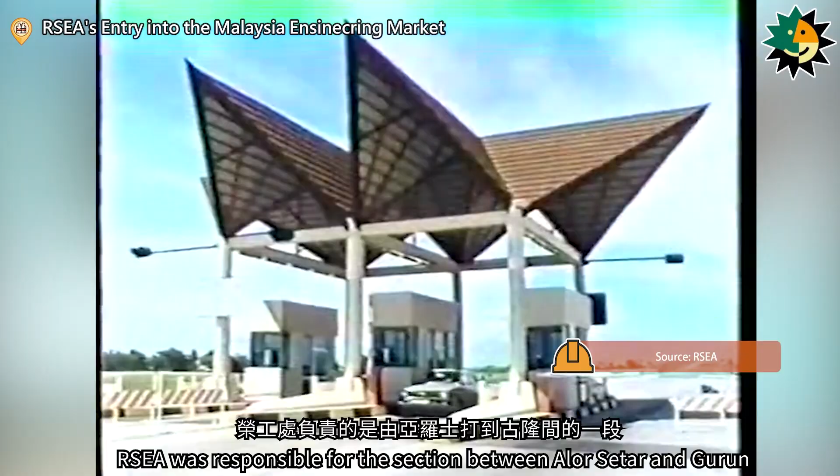The first project undertaken by RSEA Engineering Agency in Malaysia was the North-South Expressway project, a north-south highway spanning a total length of 928 kilometers. RSEA Engineering Agency was responsible for the section between Alor Setar and Gurun. As the route had to traverse swampy terrain, construction proved to be extremely challenging.

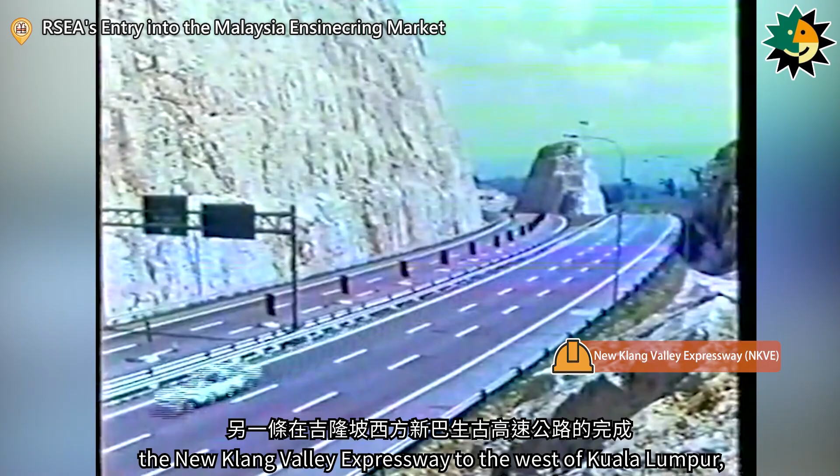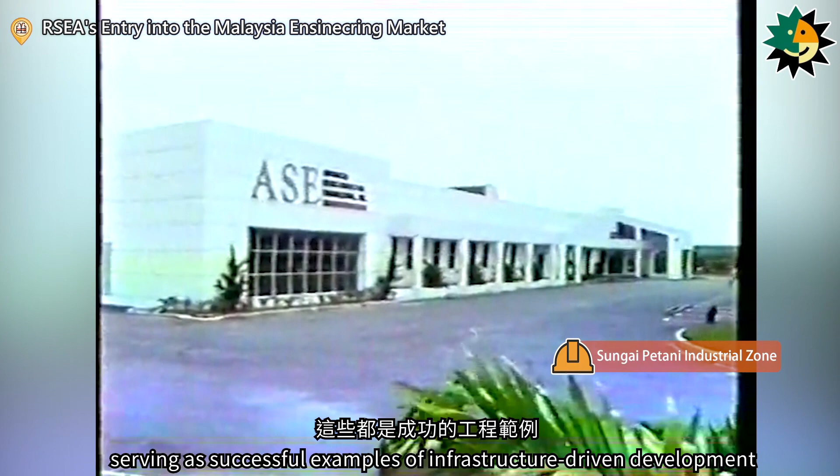The completion of another project, the new Klang Valley Expressway to the west of Kuala Lumpur, opened up a new economic backbone for the region, leading to the development of the free trade zone in Ipoh and the Sungai Petani industrial zone in Kedah. These zones attracted numerous domestic manufacturers to invest and establish factories, serving as successful examples of infrastructure-driven development.

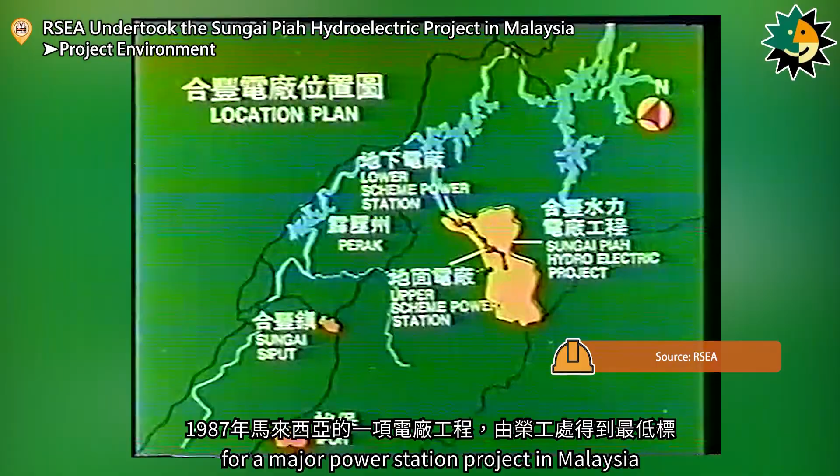In 1987, RSEA Engineering Agency won the lowest bid for a major power station project in Malaysia. The Sungai Piah Hydroelectric project, located in the mountainous region approximately 60 kilometers northeast of Ipoh in Perak, Malaysia, was a massive and formidable undertaking. The project site was located in an undeveloped rainforest at an elevation of 800 meters. To promote economic development in Perak State, the Malaysian government specifically chose the Piah River Basin for the construction of the power station. The planned catchment area covered 364 square kilometers.

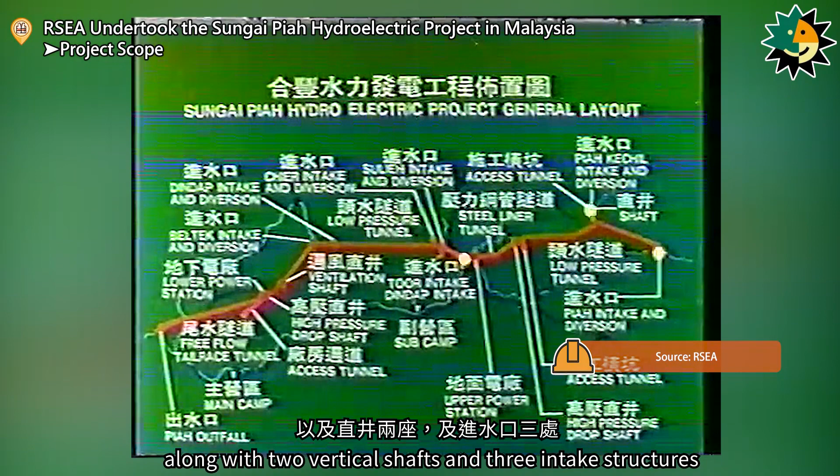The entire project was primarily divided into two construction sections, the upstream and downstream segments. The upstream section included an upper power station, a low-pressure tunnel, steel liner tunnel, and access tunnels totaling 8,000 meters in length, along with 2 vertical shafts and 3 intake structures. The downstream section included a low-pressure tunnel, plant access tunnels, a lower power station, steel liner tunnels beneath the plant, and a free-flow tail-race tunnel, totaling 16,000 meters in length. It also featured 4 intake structures and 6 vertical shafts.

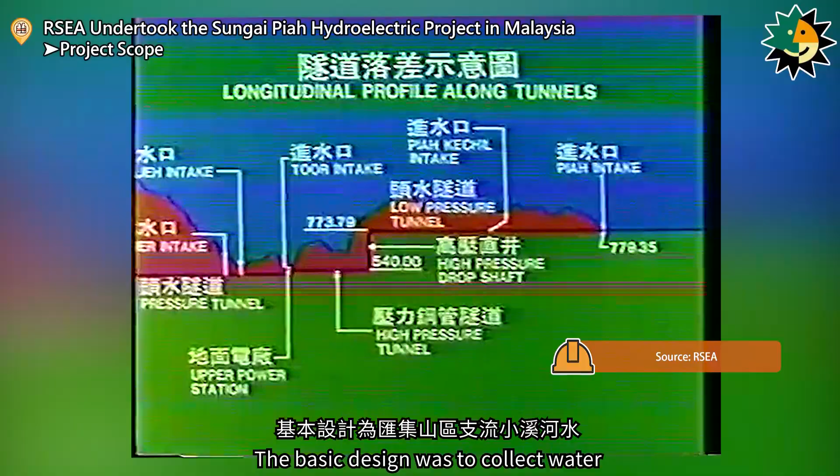Other construction work included more than 1.6 million cubic meters of surface excavation, over 300,000 cubic meters of backfilling, 66 kilometers of road improvement, 11 kilometers of new road construction, and 5 bridges. The basic design was to collect water from mountain streams and tributaries, channeling it to the power station through diversion tunnels, and using the elevation drop and abundant inflow to generate electricity.

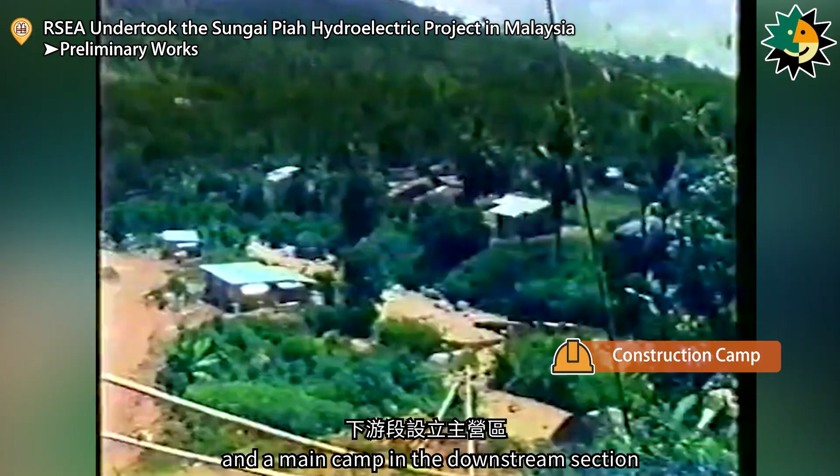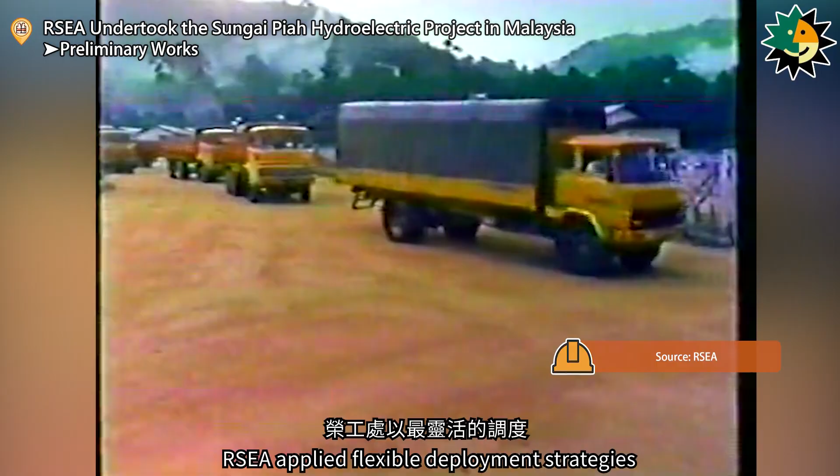The project officially began on April 10, 1987. In the early stage of construction, a secondary camp was established in the upstream section and a main camp in the downstream section. Construction equipment was sourced from Saudi Arabia, Gurun, and Taiwan. RSEA Engineering Agency applied flexible deployment strategies to make the most efficient use of these resources.

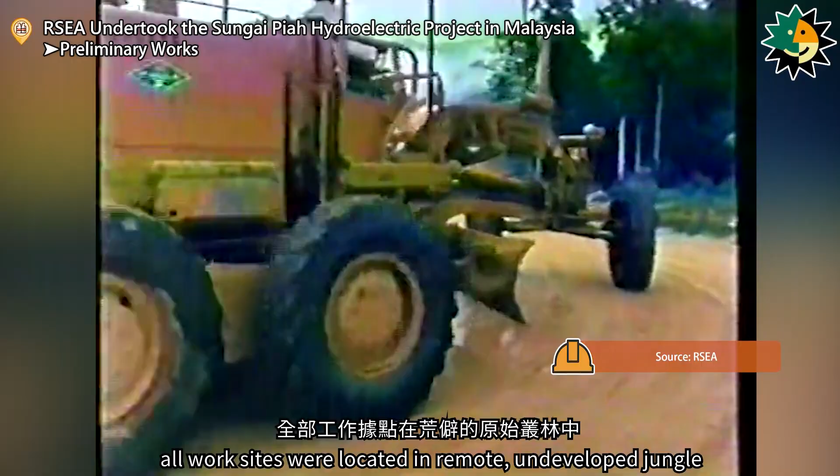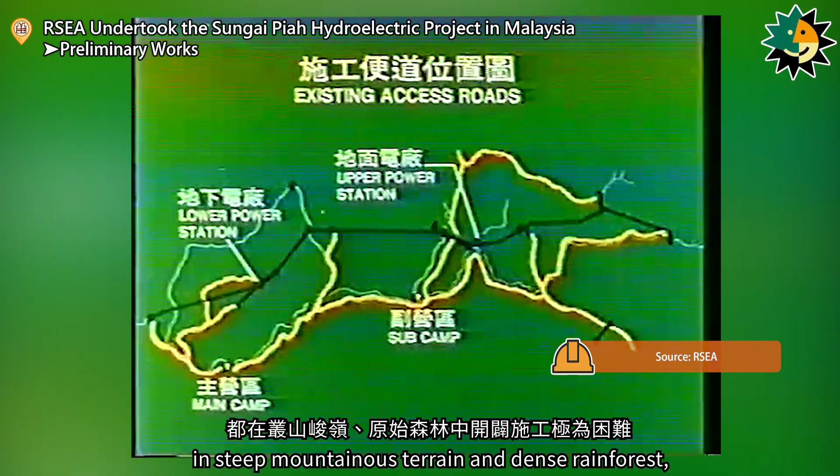As the project area spanned a radius of 95 kilometers, all work sites were located in remote, undeveloped jungle. Survey crews had to traverse mountains and ridges on a daily basis, and the work was extremely demanding. Construction roads served as the main arteries for the project, with a total road length of approximately 91 kilometers within the work area. All construction had to be carried out in steep mountainous terrain and dense rainforest, making the work extremely difficult.

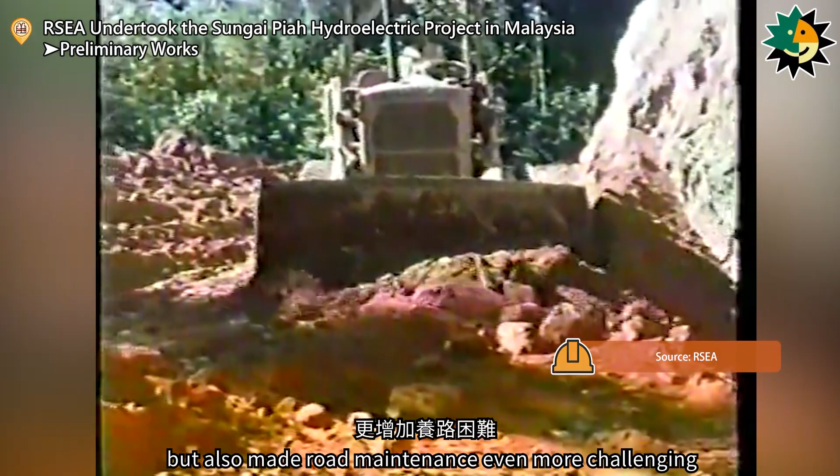Among the total length, 35 kilometers were shared with logging trucks operated by forestry agencies, which not only carried heavy loads and caused significant damage, but also made road maintenance even more challenging. RSEA Engineering Agency therefore established a dedicated road maintenance team to carry out repair and upkeep work, ensuring smooth transportation and supply access. The total length of tunnels in the Sungai Piah Hydroelectric project reached 23 kilometers, making it the most challenging part of the entire construction.

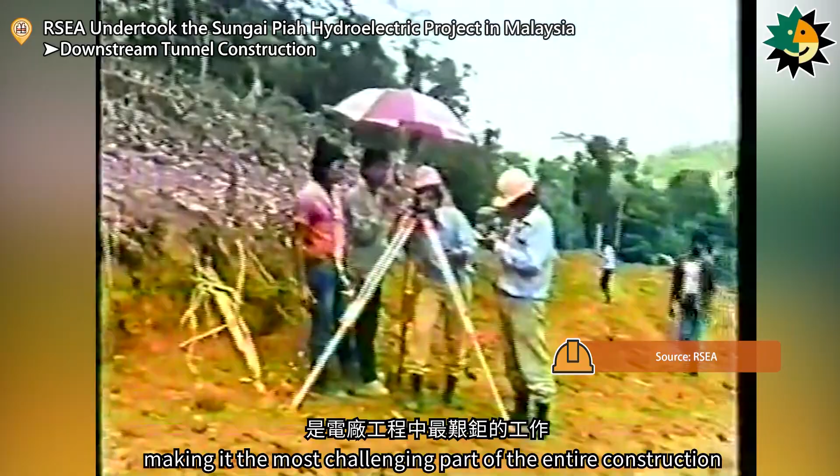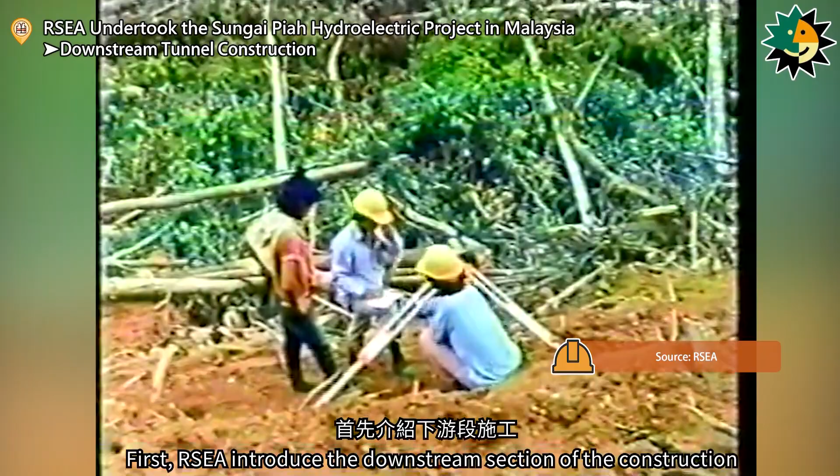First, RSEA Engineering Agency introduced the downstream section of the construction. 4 work phases were carried out simultaneously in the downstream section, including a 17-kilometer main tunnel, access tunnels, a free-flow tailrace tunnel, and 1 lower power station. The tunnels were constructed in 3 different diameters: 6.2 meters, 3.42 meters, and 3.72 meters.

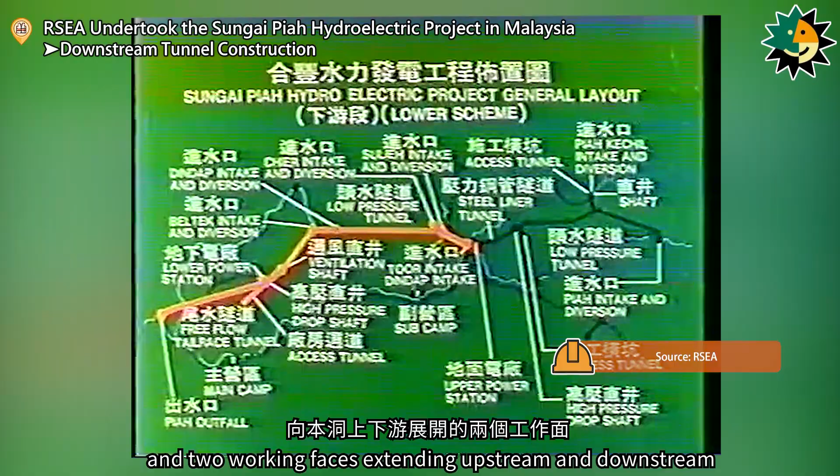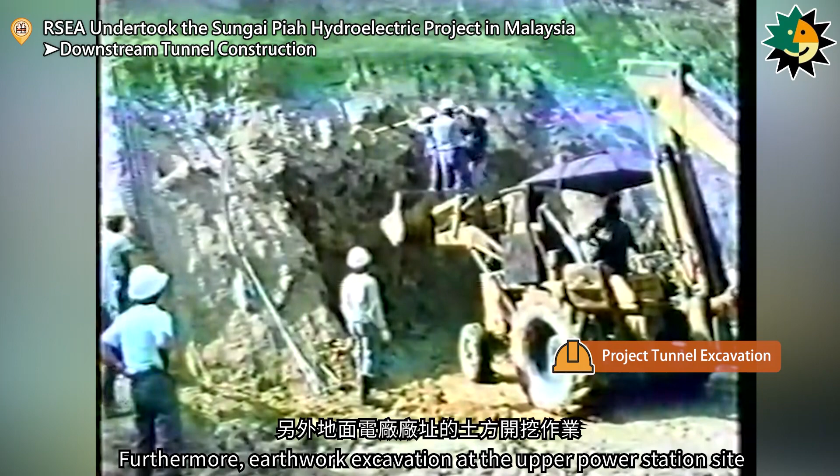At the initial stage of construction, work began at the Dindap Adit and 2 working faces extending upstream and downstream toward Beltek Adit, the access tunnel to the lower power station, the upstream vertical pressure shaft tunnel, and the Piah Kechil Adit. Furthermore, earthwork excavation at the upper power station site was also progressing at full speed.

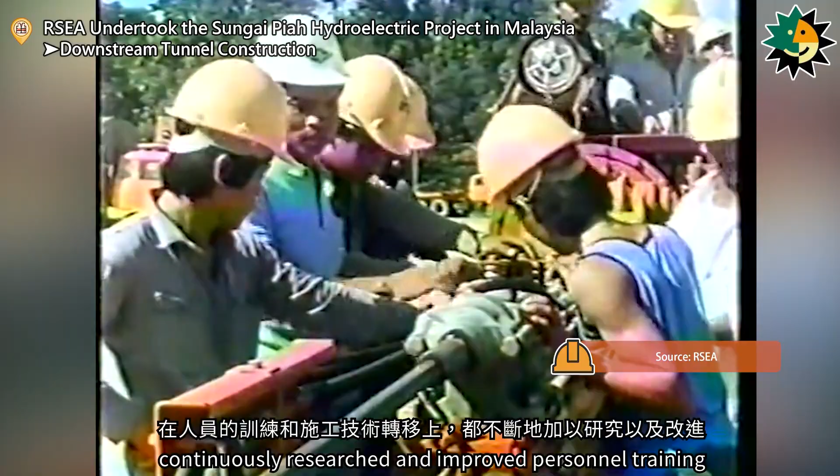In addition to on-site construction work, the Sungai Piah Construction Office continuously researched and improved personnel training and the transfer of construction techniques. This project adopted the new Austrian tunneling method for tunnel excavation. Construction personnel first conducted surveying and staking out, followed by drilling blast holes using a jumbo drill, then loading explosives and wiring them for detonation.

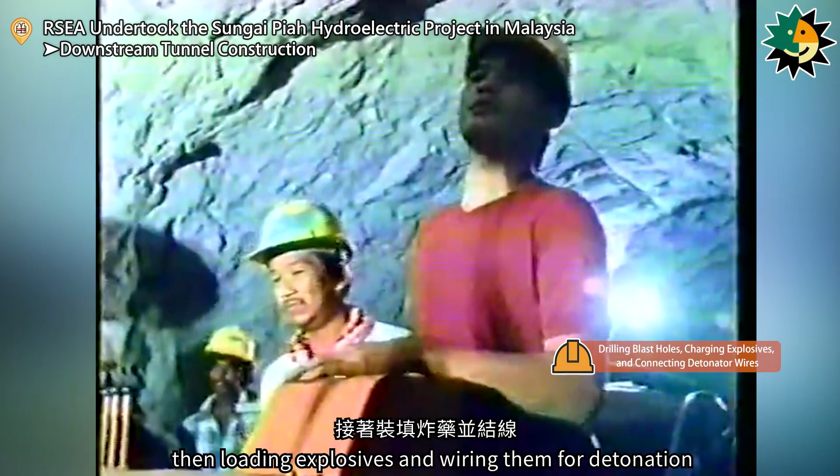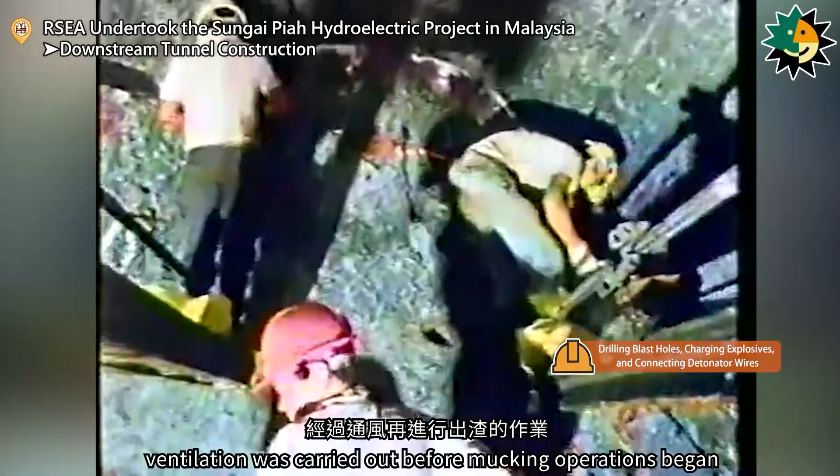To overcome the challenges of tunnel excavation, the construction team carefully developed various blasting techniques to adapt to different rock formations, avoid over-excavation, and reduce construction costs. After blasting, ventilation was carried out before mucking operations began.

In the early stages of tunnel entry, due to the narrow and extended cross-section of the tunnel, RSEA Engineering Agency had to rely on small auxiliary equipment to remove the muck in order to maintain construction progress. However, both excavation and mucking operations were difficult and affected the project schedule.

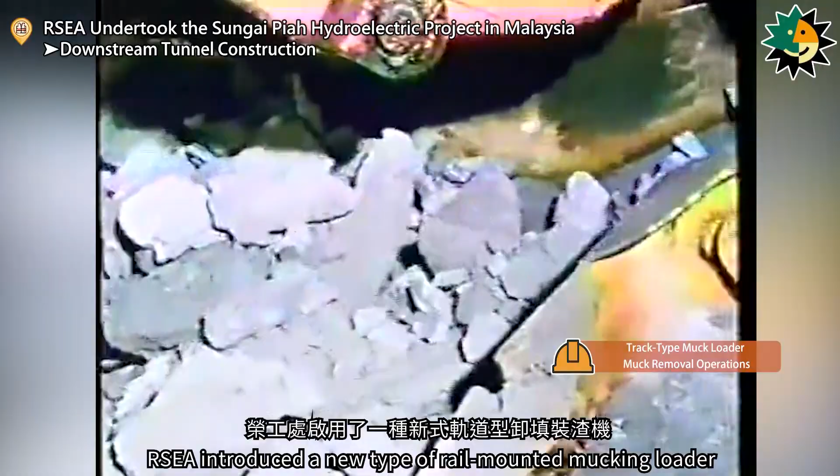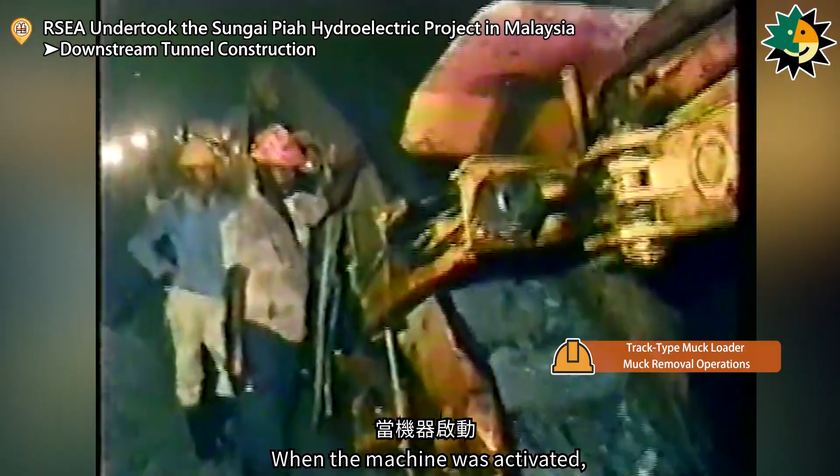To address this issue, RSEA Engineering Agency introduced a new type of rail-mounted mucking loader. At the front of the machine were 2 crab claw-like scooping arms, followed by a conveyor belt. When the machine was activated, the scooping arms alternated continuously, pushing soil and rock onto the conveyor system. The conveyor belt then quickly transported the muck backward, unloading it into the muck car stationed behind the machine.

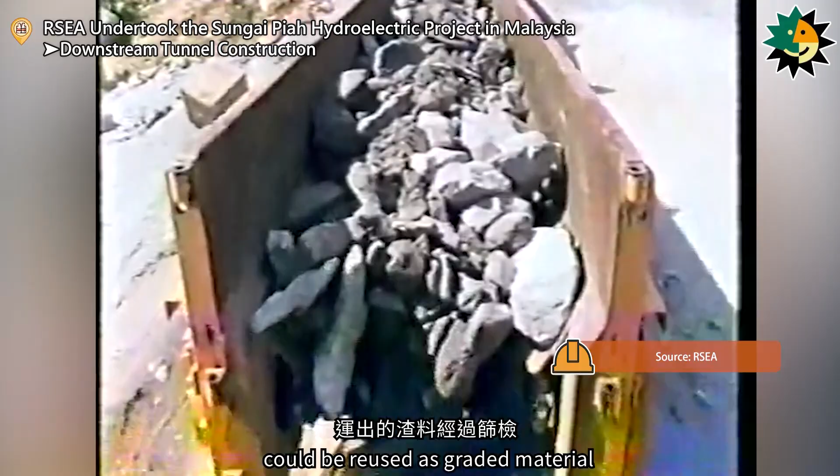The machine had a mucking capacity of 30 cubic meters per hour. After screening, the excavated material could be reused as graded material for constructing temporary access roads.

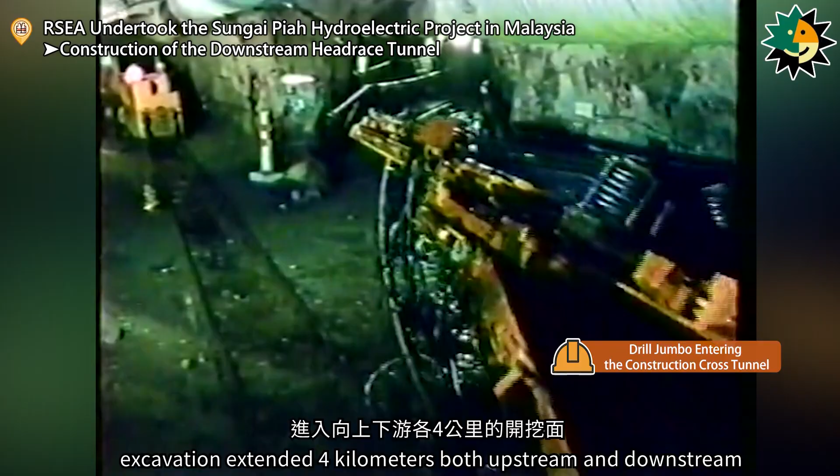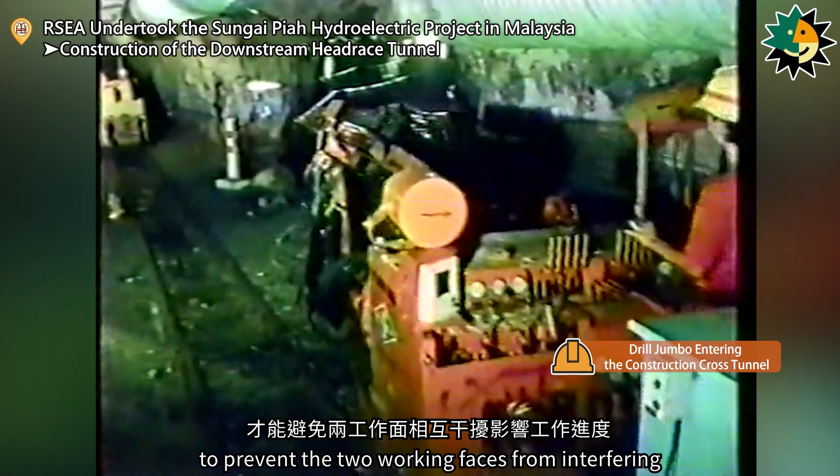In the downstream headrace tunnel, from a 200-meter adit, excavation extended 4 kilometers both upstream and downstream. Since there was only one access point, RSEA Engineering Agency had to carry out meticulous planning and calculations to prevent the 2 working faces from interfering with each other and affecting construction progress.

Owing to the use of the smooth blasting method, the tunnel face exhibited a neat and visually appealing result. The rock quality in the downstream headrace tunnel was excellent, allowing for the immediate commencement of the invert concrete work after surface cleaning. Meanwhile, 4 working faces in the upstream section were deployed simultaneously.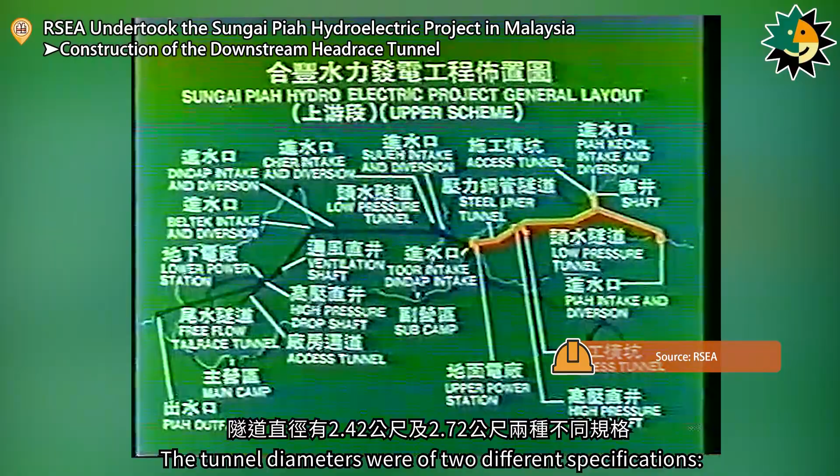These included the 8-kilometer-long main tunnel, access tunnels, vertical shafts, and 1 open-air powerhouse. The tunnel diameters were of 2 different specifications, 2.42 meters and 2.72 meters.

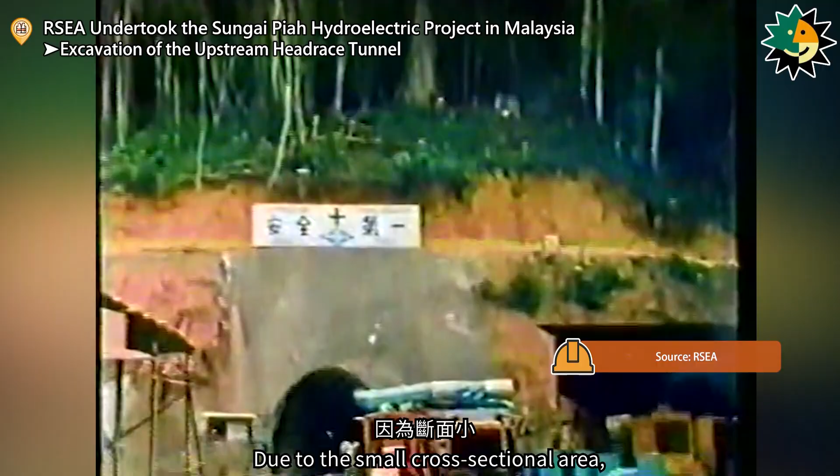The upstream low-pressure tunnel passed through a fault zone with extremely weak rock. Due to the small cross-sectional area, excavation machinery could not be used, therefore, manual ring-cut excavation was adopted.

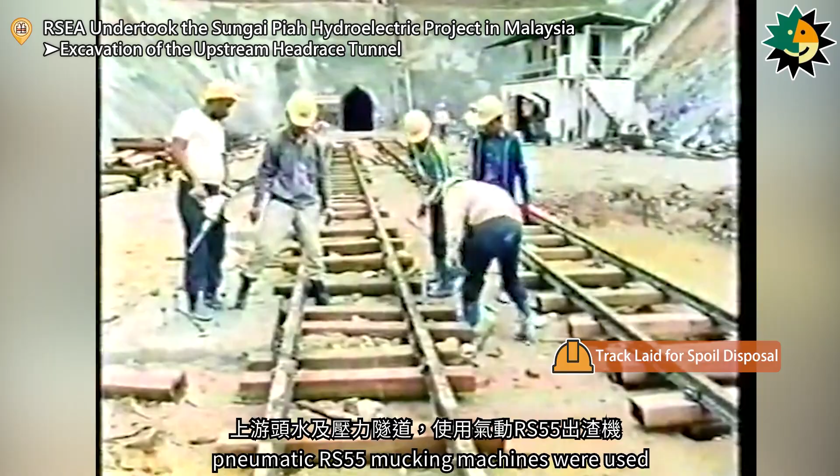Before the track was fully laid, construction workers relied on small auxiliary equipment to remove excavated material in order to maintain the construction schedule. When the track was fully laid, pneumatic RS-55 mucking machines were used in the upstream low-pressure and steel liner tunnels, in combination with small 2 cubic meter muck cars for debris removal, achieving a mucking capacity of 6 cubic meters per hour.

Powered by compressed air, the RS-55 mucking machine offers several advantages, including zero air pollution, compact size, and ease of operation.

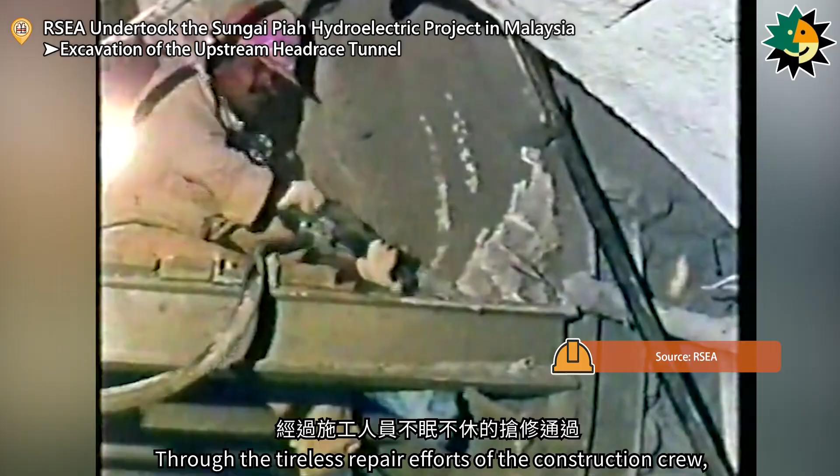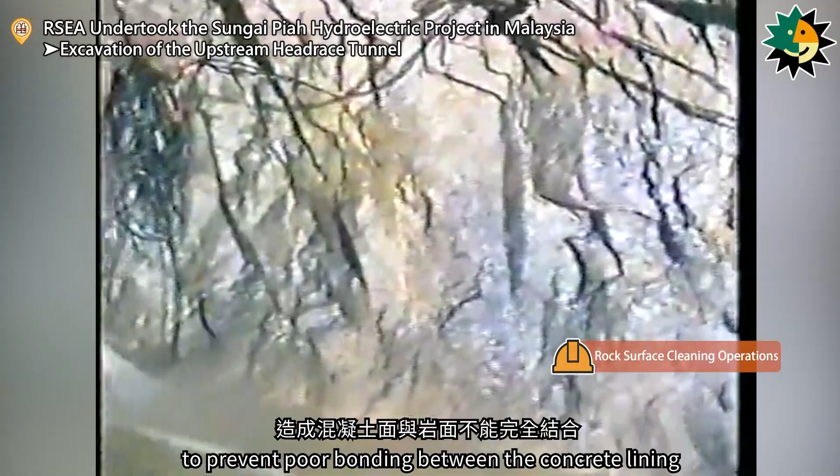Before proceeding with the tunnel concrete lining, the rock surface had to be thoroughly cleaned to prevent poor bonding between the concrete lining and the rock surface after completion. RSEA Engineering Agency used a movable steel formwork system to cast the concrete lining. Each steel formwork was 11.8 meters long and could pour up to 9 meters in one operation.

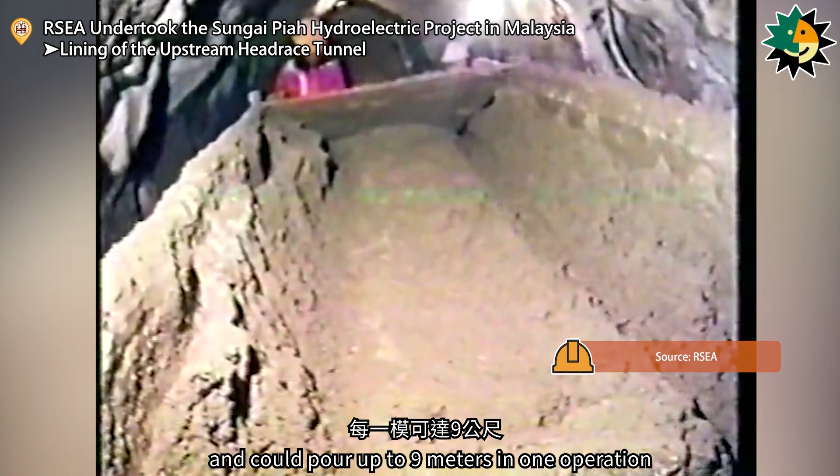The entire Piah low-pressure tunnel was constructed using 3 different lining types: reinforced concrete, plain concrete, and concrete-filled steel tubes. 8 hours after casting, the movable steel formwork could be removed from the tunnel. Through such repeated operations, the tunnel lining was gradually completed.

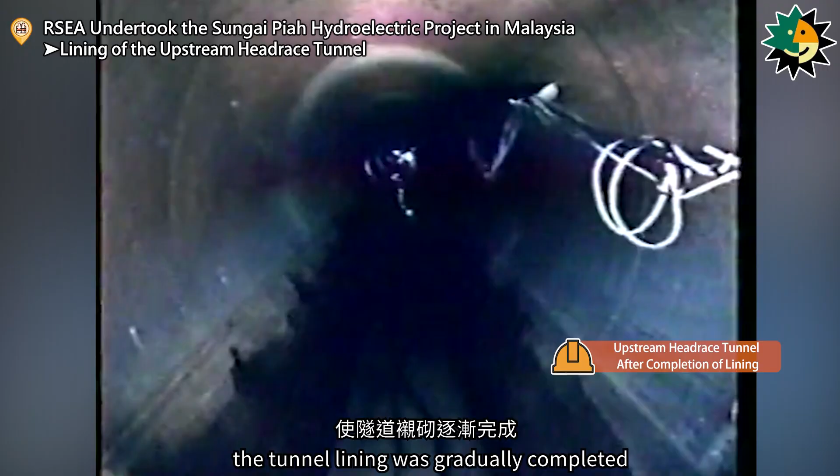Since the pressure tunnel must withstand water flow pressure, in addition to the concrete lining, high-pressure grouting was also carried out to fill the gaps between the rock layers.

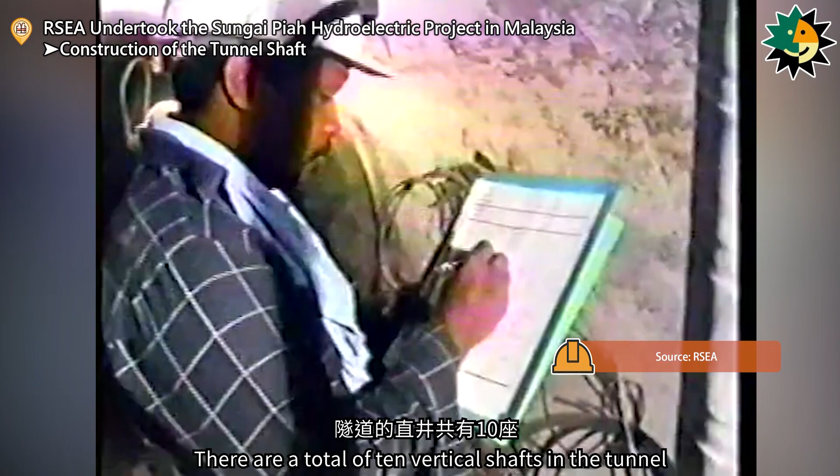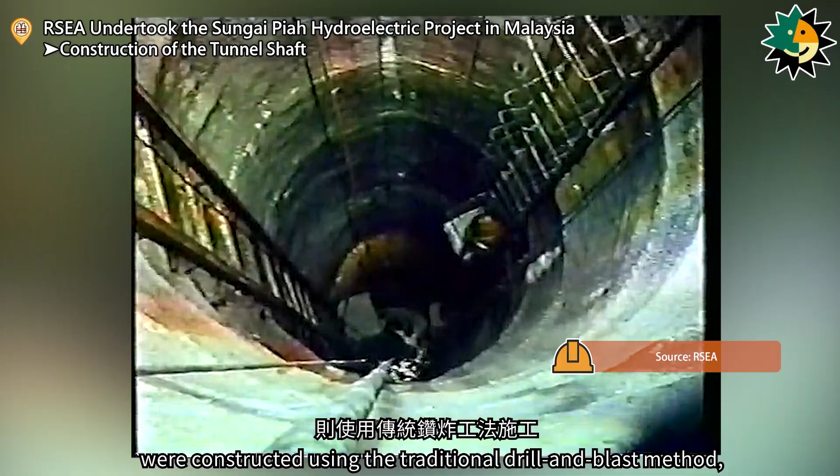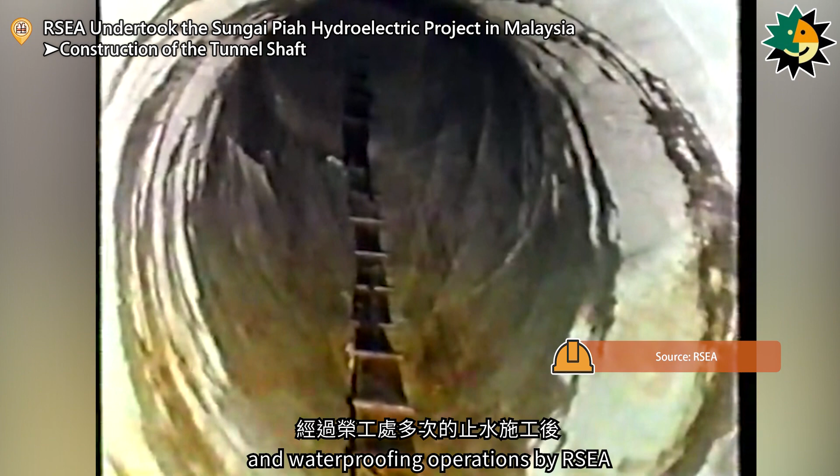Due to the abundant groundwater in the upstream pressure shaft, it was only after multiple grouting and waterproofing operations by RSEA Engineering Agency that the severe seepage issue was finally overcome.

There are a total of 9 check dams, distributed throughout the entire route, and all are miniature-scale small dams.

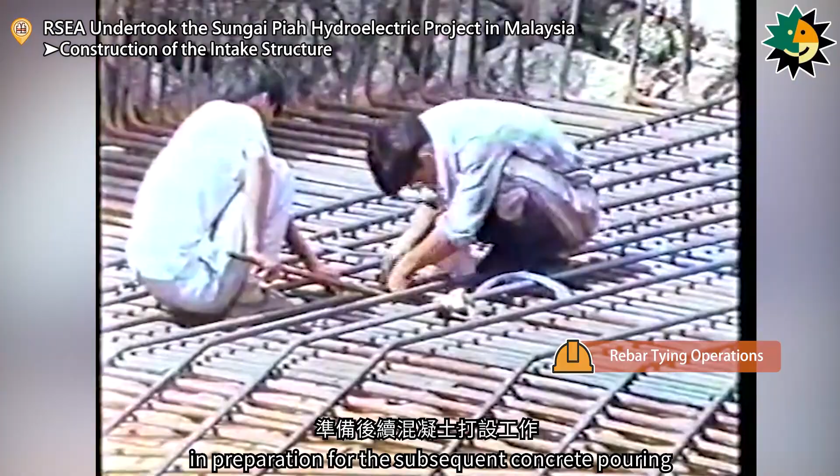The intake structure at the site is under full-scale construction, with workers tying rebar in preparation for the subsequent concrete pouring. Due to terrain constraints, the concrete placement is extremely difficult. In addition to using concrete pumps, a bucket hoisting method is also employed.

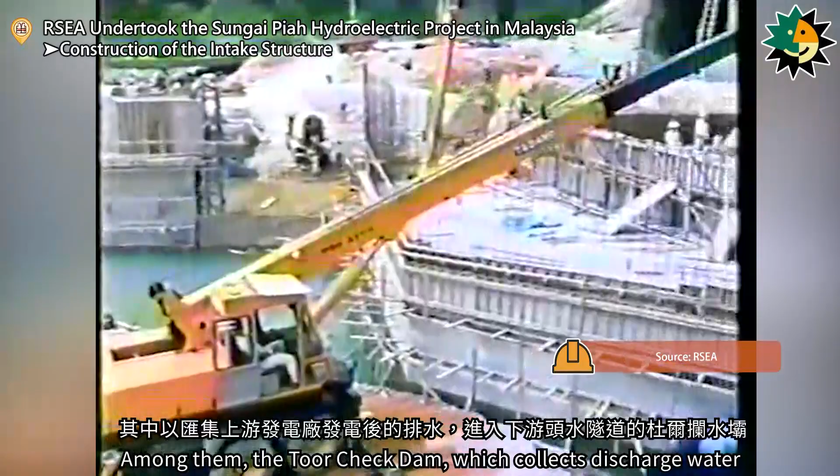Among them, the Toor Check Dam, which collects discharge water from the upstream power station and channels it into the downstream headrace tunnel, is the largest of the check dams.

The Sungai Piah Hydroelectric project includes 2 power stations in total, one of which, a lower power station, belongs to the downstream construction section. The lower power station's access tunnel was excavated by RSEA Engineering Agency.

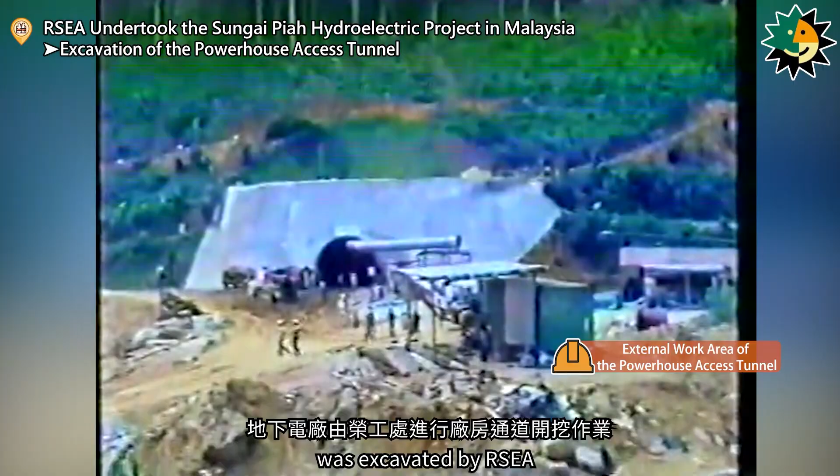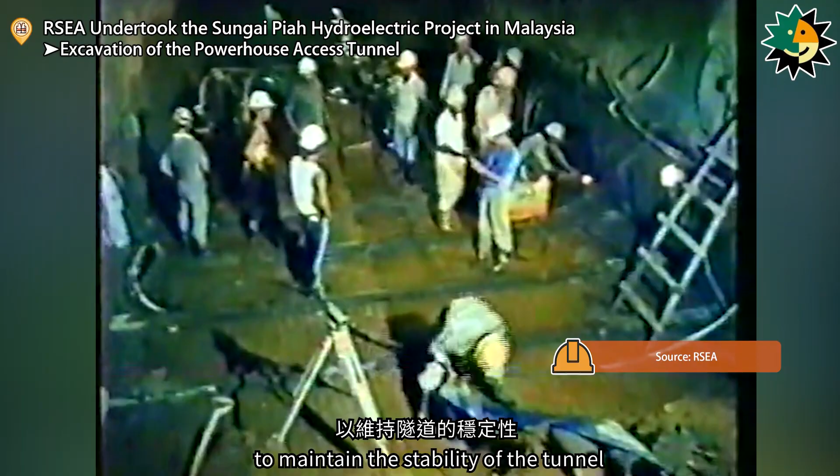Due to excessively loose geological conditions in certain sections of the tunnel, inverted arch concrete was immediately poured after excavation to maintain the stability of the tunnel. RSEA Engineering Agency used a dual-boom, rubber-tired, electric jumbo drill to bore blast holes.

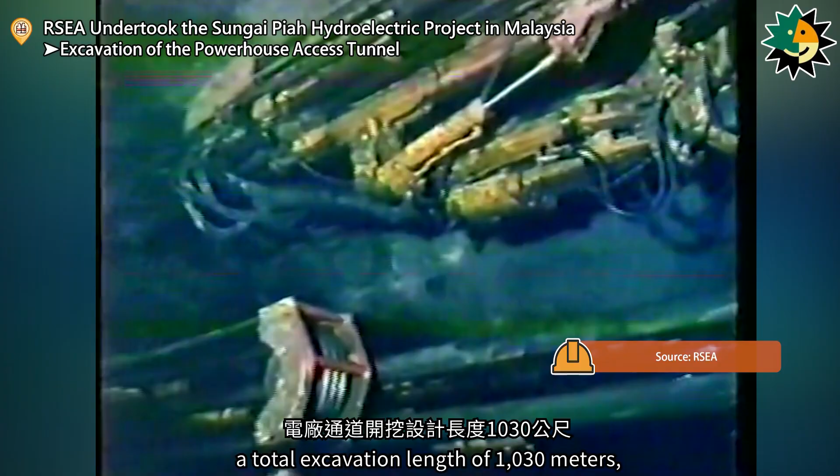The power station access tunnel was designed with a total excavation length of 1,030 meters, with a downward gradient of 12%, and was constructed using the new Austrian tunneling method.

However, during tunnel excavation, a large amount of groundwater was encountered, gushing out from the tunnel face as if a dam had burst.

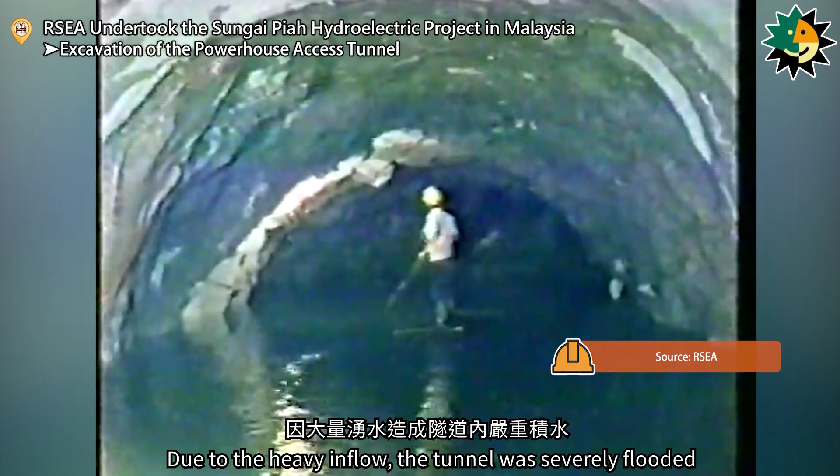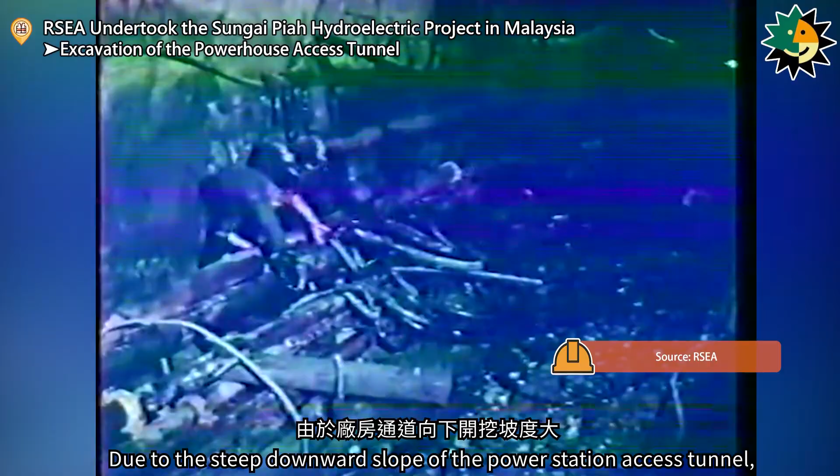Due to the heavy inflow, the tunnel was severely flooded. Under extremely difficult circumstances, several high-head large-capacity pumps were urgently deployed. Due to the steep downward slope of the power station access tunnel, pumping out water was extremely difficult.

After careful planning by the construction team and continuous day and night pumping, the heavy groundwater inflow was eventually overcome, and the excavation of the power station access tunnel was completed.

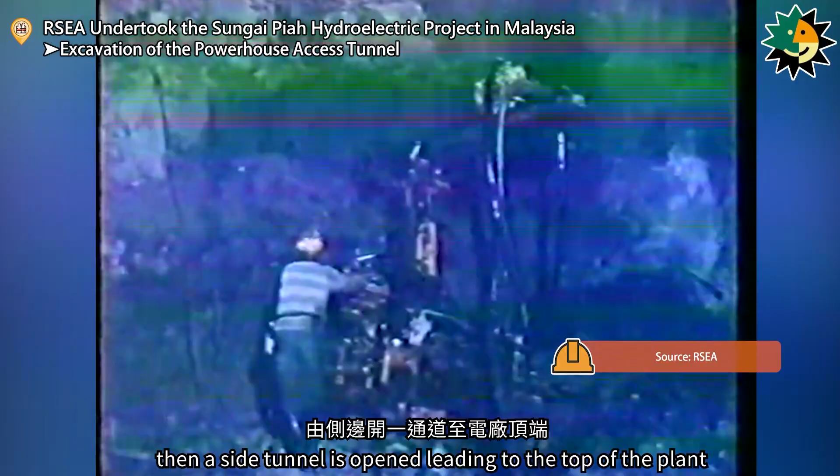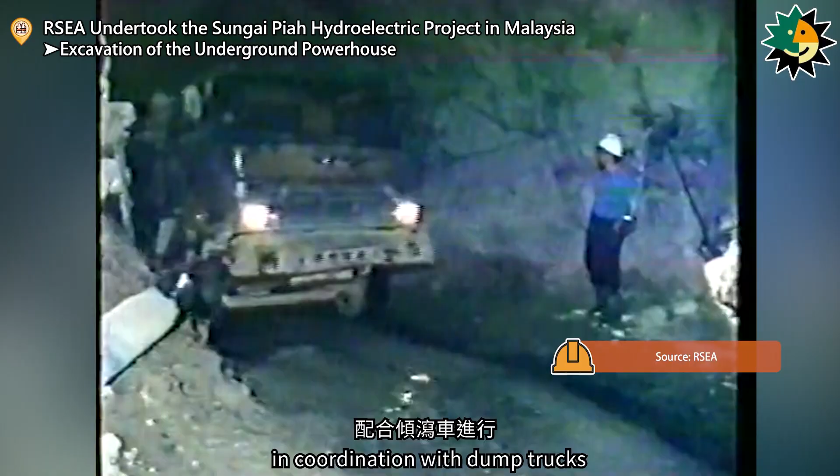After entering the lower power station, a natural underground stalactite cave was discovered on the side of the plant. As it concerned the safety of the power station and the tail race, RSEA Engineering Agency carried out rock surface protection and implemented necessary protective measures within the natural cave.

The lower power station is located within the mountain, designed as a plant measuring 64 meters in length, 16 meters in width, and 25 meters in height, housing 2 generators.

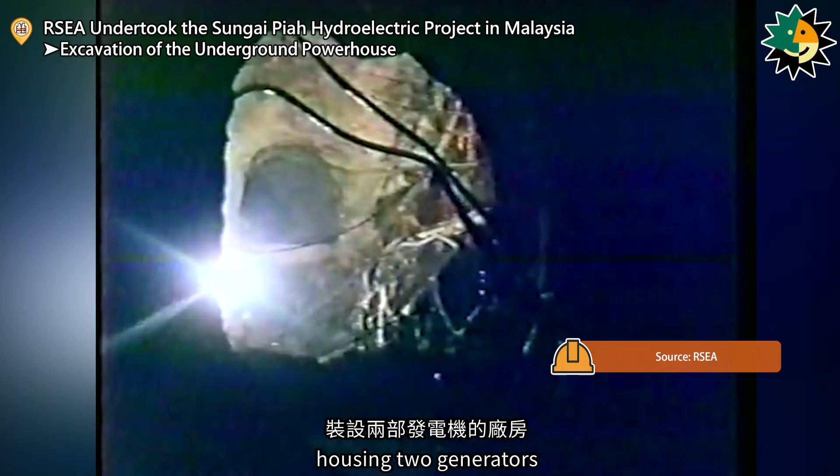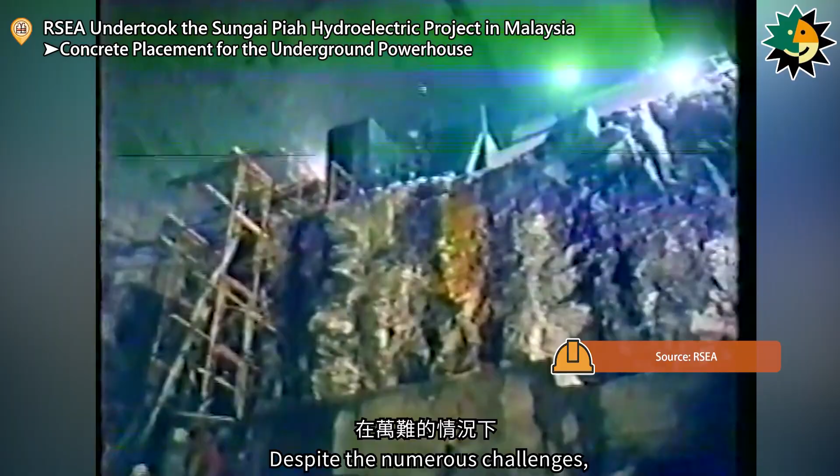After the lower power station excavation was completed, concrete casting operations commenced. Due to spatial and topographical constraints, RSEA Engineering Agency adopted various methods: concrete pump truck casting, electric pump casting, and chute casting. Despite the numerous challenges, the concrete casting work was eventually completed.

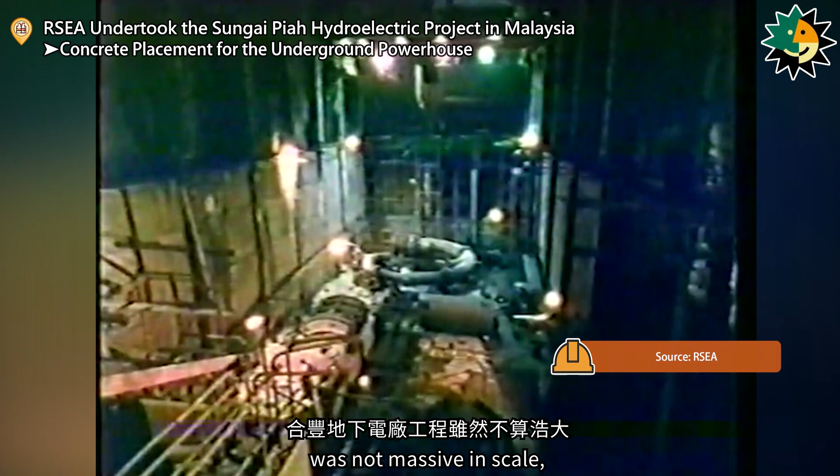While the concrete was being cast in the lower power station, it was necessary to coordinate with foreign contractors for the installation of the generator units, and RSEA Engineering Agency was responsible for installing the pressure pipelines. Although the Sungai Piah Lower Power Station project was not massive in scale, it was extremely challenging, and the construction team overcame numerous hardships to complete it.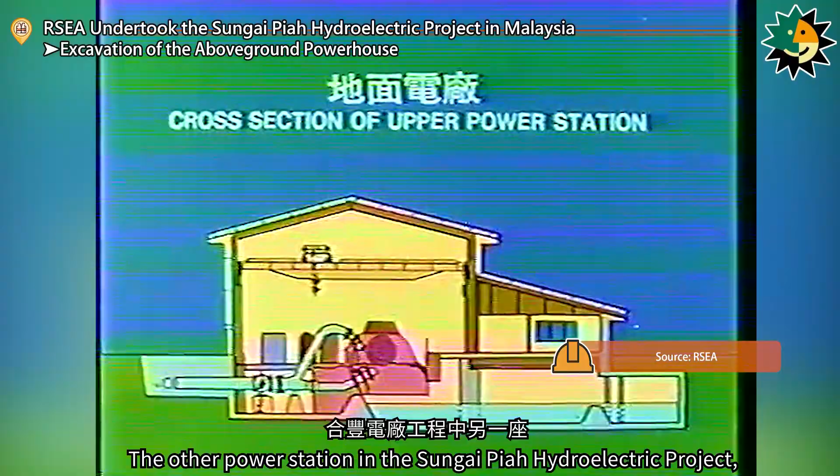The other power station in the Sungai Piah Hydroelectric project, located at the upstream section, was an upper power station. This upstream upper power station was constructed using a high-slope excavation method. While excavation was carried out, vegetation was planted simultaneously to protect the stability of the slopes.

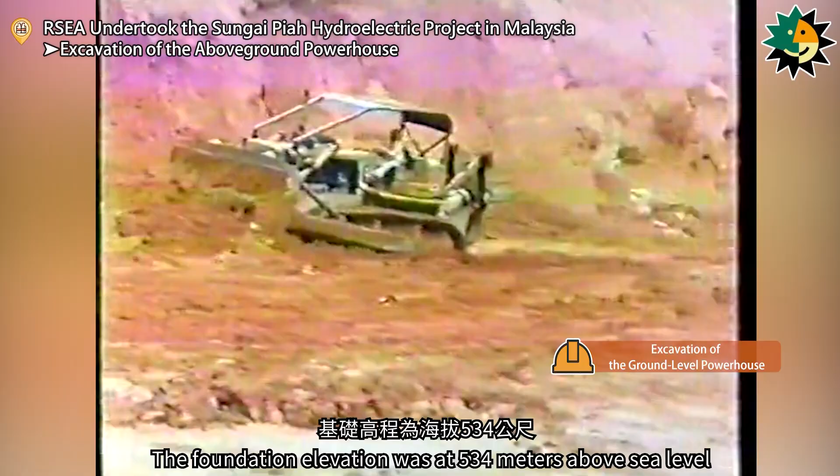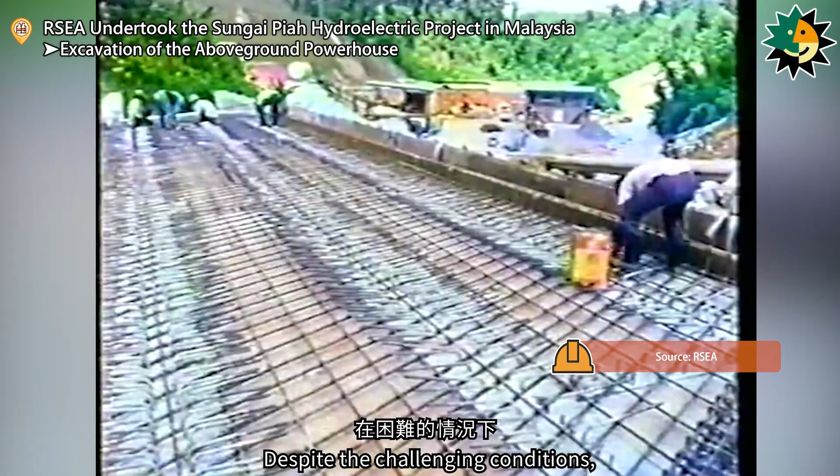The total excavation area of the plant measured 40 meters in length and 40 meters in width, with an average excavation depth of 5.3 meters and a total earthwork volume of 8,000 cubic meters. The foundation elevation was at 534 meters above sea level. After completing the site leveling, RSEA Engineering Agency proceeded with the excavation work, while simultaneously constructing the drainage facilities for the power station. Despite the challenging conditions, a concrete bridge was built to provide access to the upper power station.

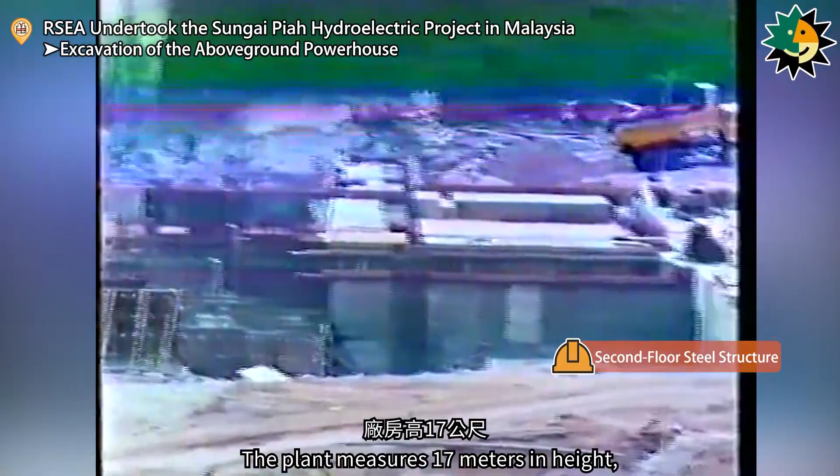The upper power station on the upstream section of the Sungai Piah Power Station is an open-air facility. The first floor is constructed with reinforced concrete, while the second floor adopts a steel structure. The plant measures 17 meters in height, 27 meters in width, and 36 meters in length.

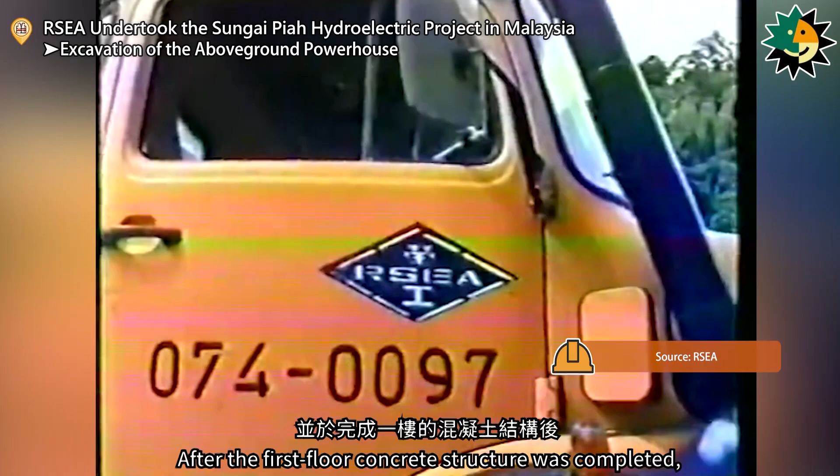RSEA Engineering Agency carried out the foundation concrete pouring work. Upon completion of the foundation, the main structural concrete for the power station was cast. After the first floor concrete structure was completed, the installation of the turbine crane was handed over to the client.

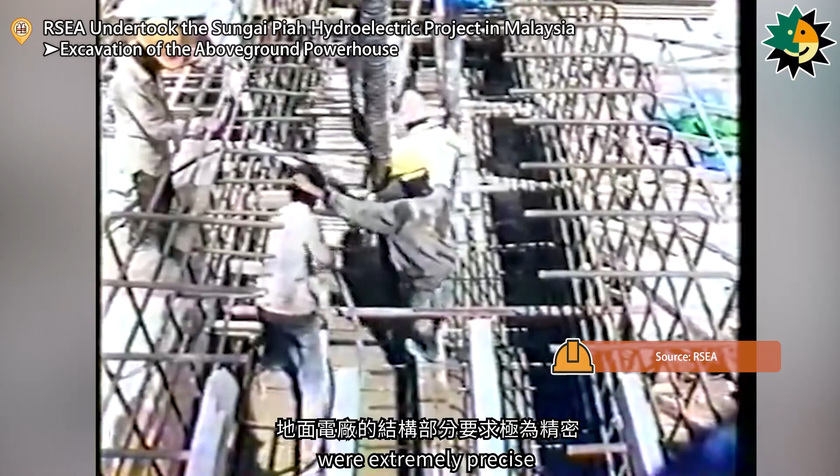The structural requirements for the upper power station were extremely precise. During the concrete placement, RSEA Engineering Agency had to coordinate with the foreign contractor responsible for the generator units to embed components and carry out the civil works accordingly.

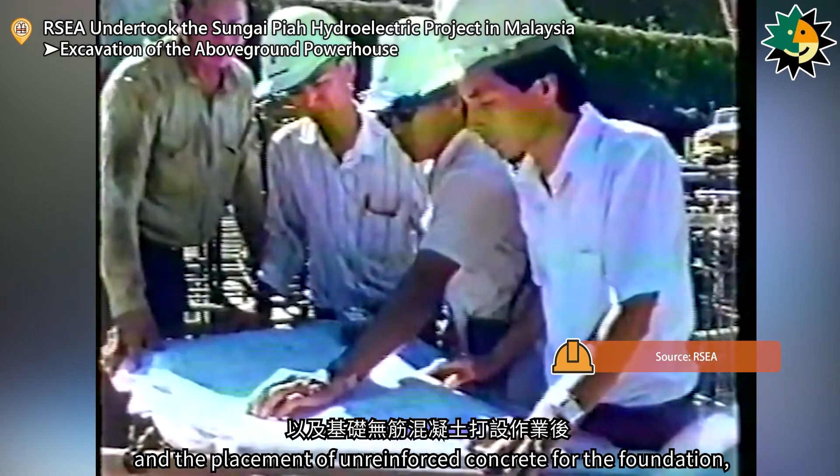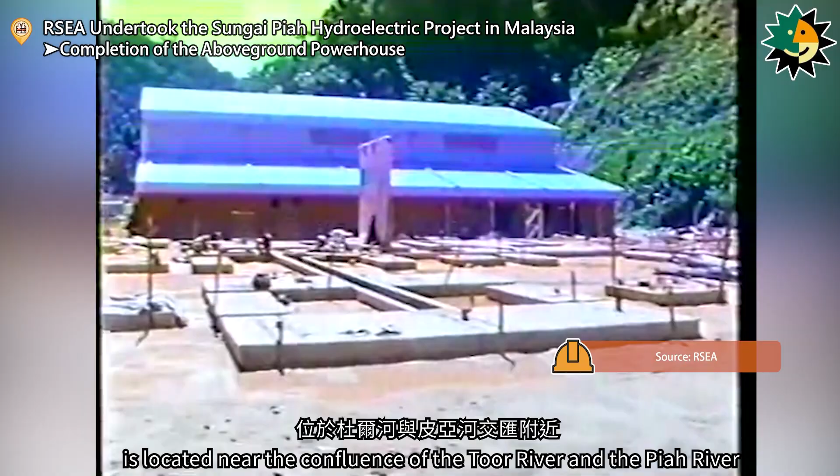The construction of the upper power station, after completing the tail race drainage structure, the foundation excavation, and the placement of unreinforced concrete for the foundation, then proceeded to the structural concrete placement phase for the turbine hall, cable conduits, and other related structures. This upper power station is located near the confluence of the Toor River and the Piah River. Its foundation concrete is 2 meters thick and is designed to accommodate 2 generators.

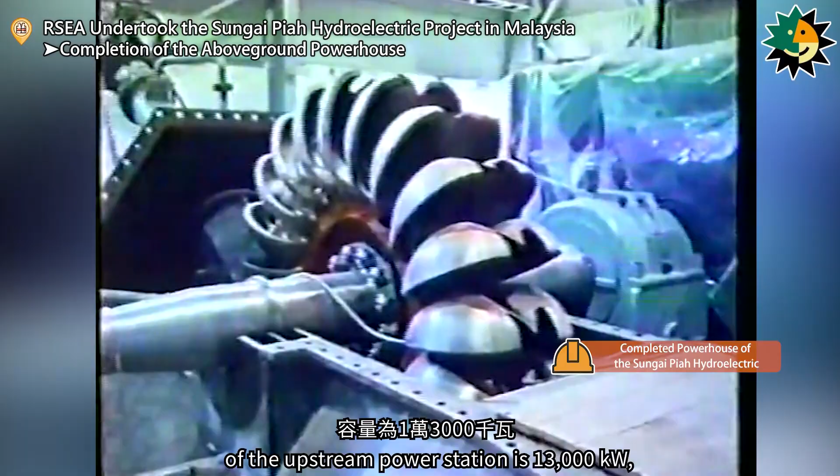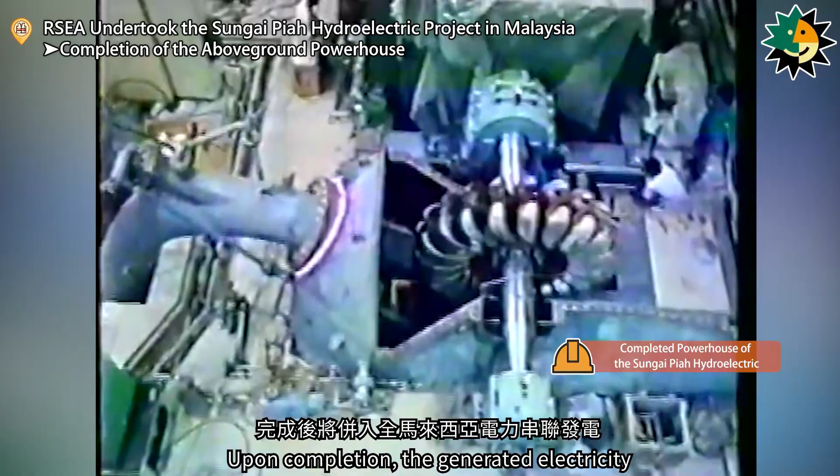The upstream upper power station and the downstream lower power station of the Sungai Piah Hydroelectric project are approximately 10 kilometers apart. The designed power generation capacity of the upstream power station is 13,000 kilowatts, while that of the downstream power station is 51,000 kilowatts, bringing the total installed capacity to 64,000 kilowatts. Upon completion, the generated electricity will be integrated into Malaysia's national grid, supplying the entire power demand of the Ipoh area in Perak State, thus making a significant contribution to the economic development of the Malaysian people.

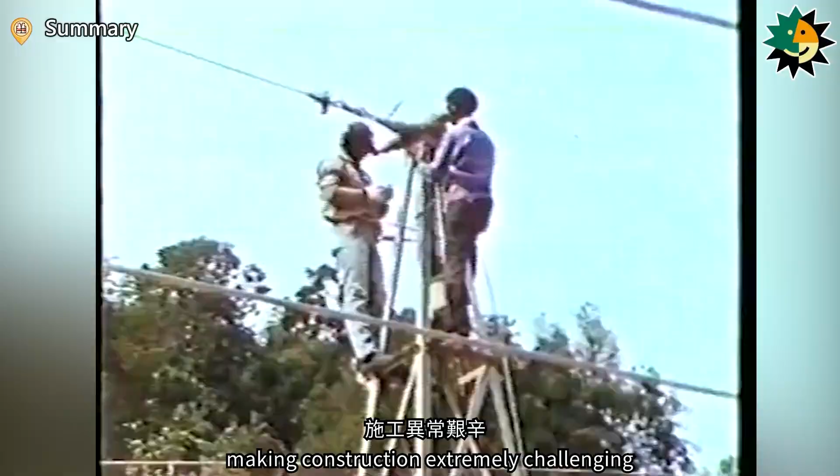This hydroelectric project was located in a remote area, making construction extremely challenging. In addition to facing tropical monsoon seasons, workers also had to contend with threats from tigers, elephants, and wild bees. These RSEA Engineering Agency's staff working at overseas construction sites have endured hardship and fought with perseverance.

Many of the hardships and joys in their work and daily life were transformed into a strong fighting spirit and loyal cohesion through their faithful embodiment of RSEA Engineering Agency's 4 core management principles. Through their relentless efforts and strategic growth, RSEA Engineering Agency has expanded and established itself as a key player in Malaysia's engineering market.